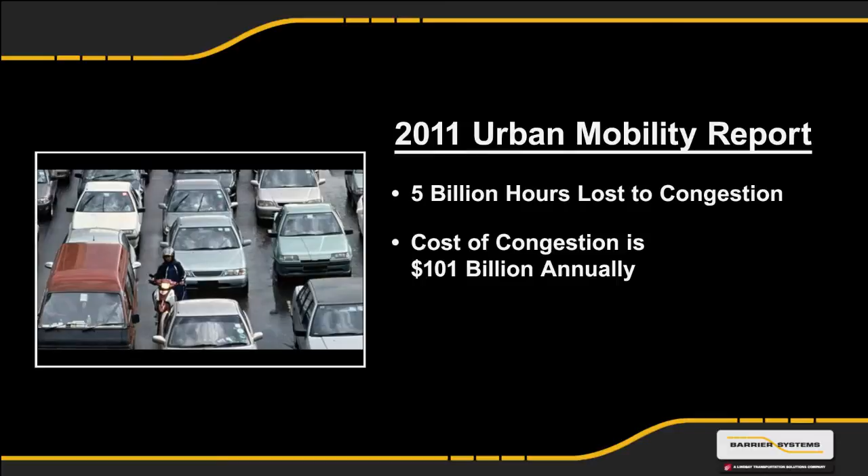While population, drivers, vehicles, miles traveled, and hours of delay have all seen double-digit growth, the number of lane miles of roadway grew only 6.6% between 1982 and 2006. The new challenge for planners and highway engineers is to utilize cost-effective methods and technologies in order to meet this increasing highway demand.

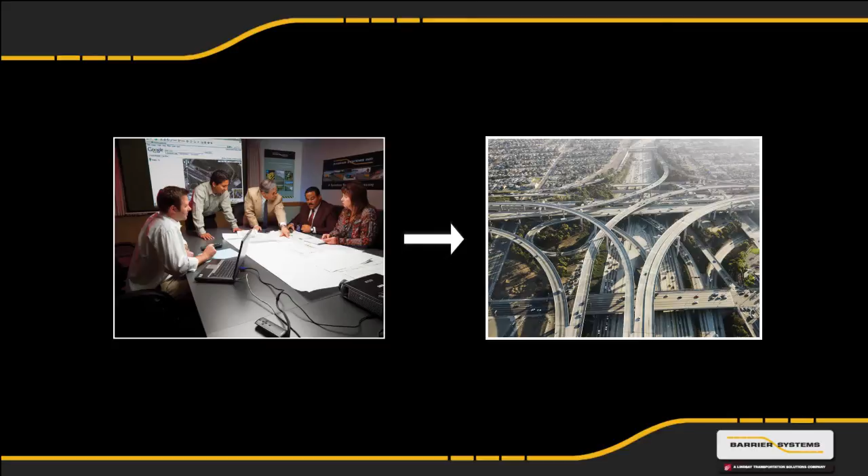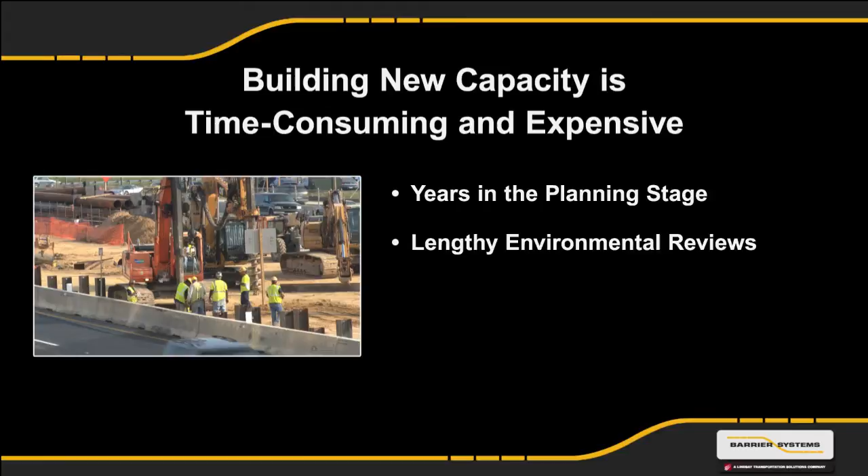One approach to congestion mitigation is to build new capacity by adding new roadways or by increasing the size of existing roadways, either outward with widening, upward in elevated structures, or downward in tunnels. Building new capacity is both time-consuming and extremely expensive, up to $10 million per urban lane mile according to the FHWA.

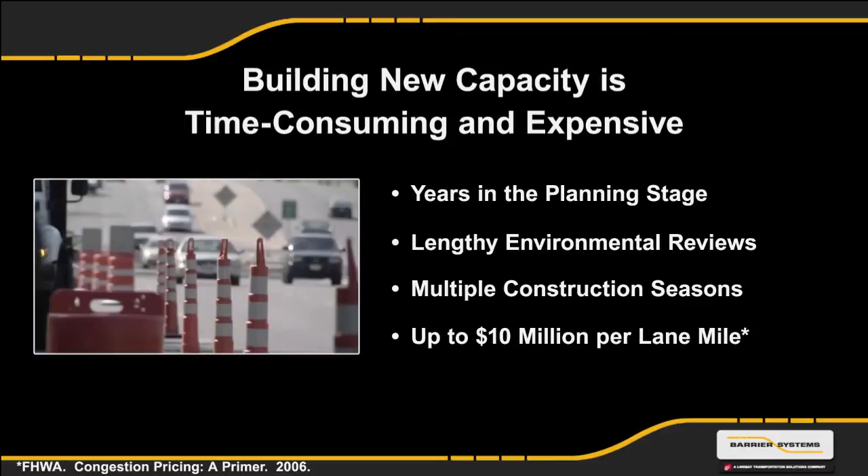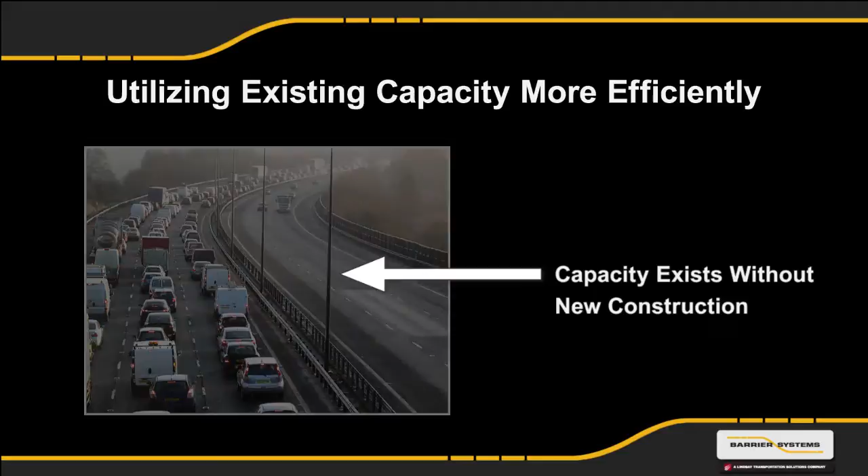Another congestion mitigation strategy focuses on utilizing the existing roadway capacity more efficiently with little or no additional construction. Managed lanes are growing in popularity as many agencies search for alternatives to expensive new construction. Agencies that implement managed lane facilities must choose a method of separating opposing lanes of traffic.

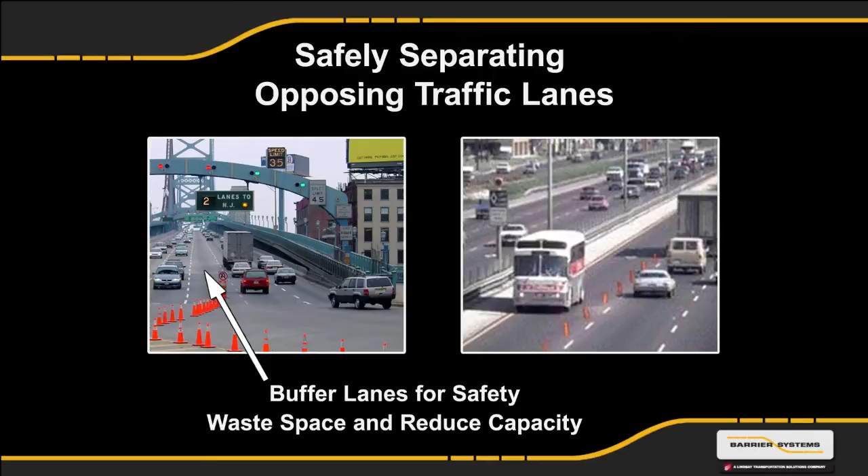Overhead lights and plastic delineation are common in managed lanes facilities, but there are serious safety implications, and eventually this type of configuration will result in head-on collisions with serious injuries and fatalities. Buffer lanes can be used, but this defeats the purpose of using managed lanes to mitigate congestion.

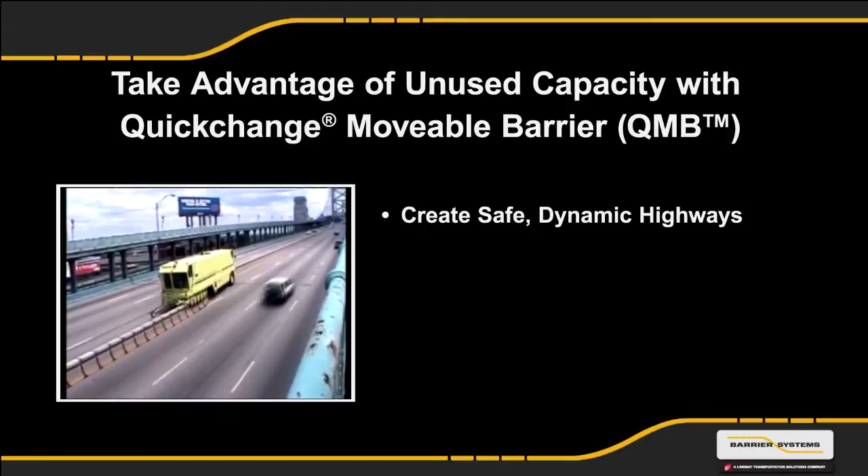Movable barrier technology is used for managed lanes and construction applications to create safe, dynamic highways that offer real-time roadway reconfiguration while maintaining positive barrier protection between lanes. For managed lanes facilities, movable barrier is used in areas where there is a directional or tidal traffic flow to redistribute unused capacity from the off-peak traffic direction to give more lanes to peak traffic.

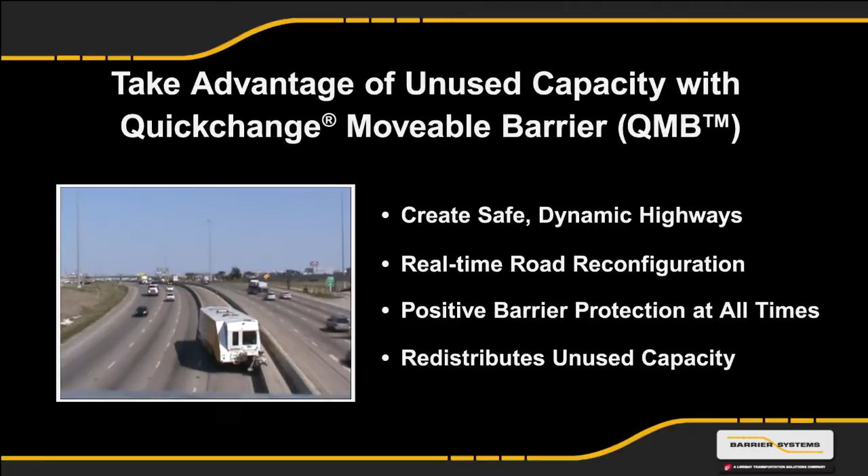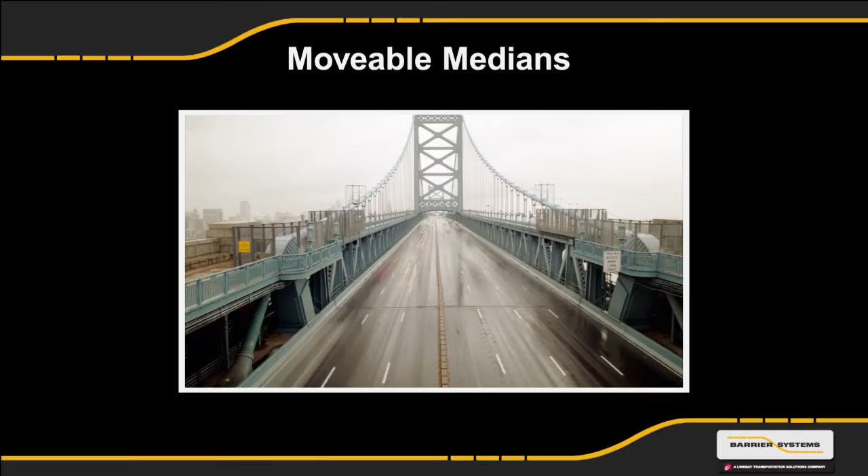The movable median is perhaps the simplest way of optimizing highway capacity. In this case, there is no fixed barrier on the highway, and the movable barrier is the only barrier. The barrier is moved back and forth multiple times per day to reconfigure the roadway based on the needs of peak traffic.

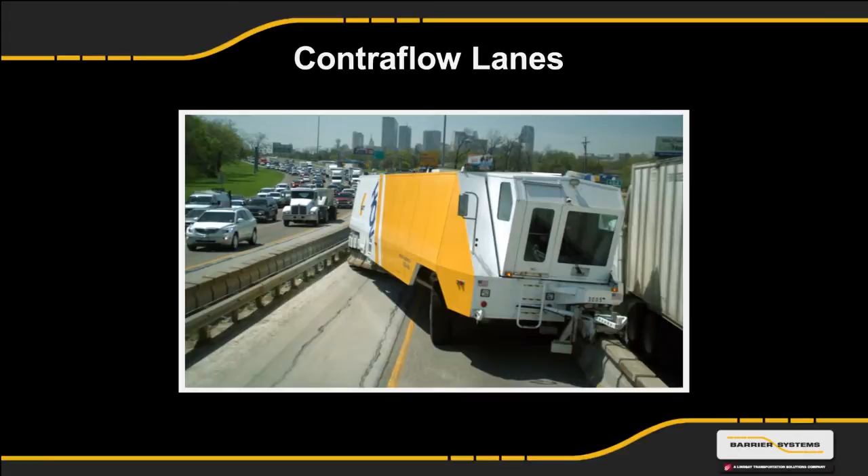In cases where a single movable median barrier may not be practical, contraflow lanes can be created using two movable walls, one on each side of the roadway. The barrier is moved out one or more lanes to give extra capacity to the peak traffic direction, and the lanes are returned during off-peak traffic periods.

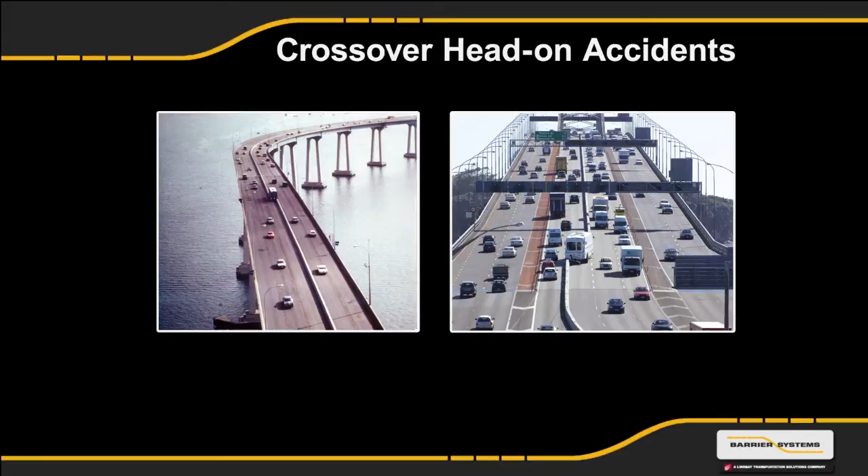The critical importance of positive barrier protection between opposing traffic lanes can be seen in these case studies. In each case, plastic delineation and overhead lights were used to separate traffic as the lanes were reconfigured throughout the day.

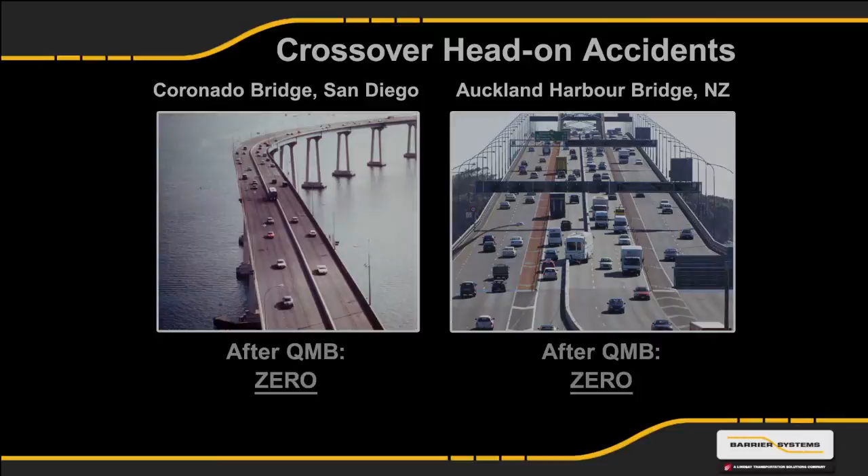The Coronado Bridge in San Diego had 21 crossover accidents in the 3 years prior to implementing movable barrier with 2 fatalities, and the Auckland Harbour Bridge had 20 crossover accidents in the 5 years prior to movable barrier with 10 fatalities. Since implementing the positive protection of movable concrete barrier, both facilities have experienced 0 crossover accidents and related fatalities.

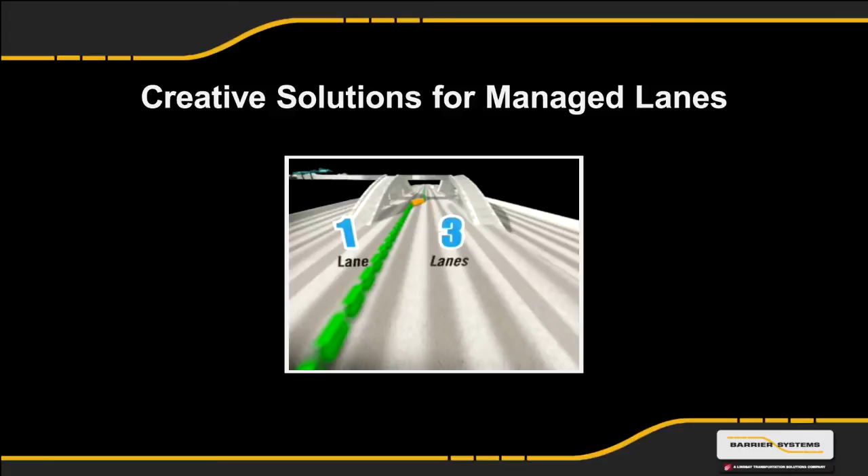Movable barrier provides agencies with a flexible and safe way to create unique managed lanes facilities. In San Diego, the I-15 corridor has 4 lanes in the center of the freeway with a movable median to create a 1-3, 2-2, or 3-1 configuration based on the needs of peak traffic. In Sydney, Australia, a movable median barrier adds a center lane to the peak traffic direction, and the outside lane is converted to a bus-only lane during the AM peak.

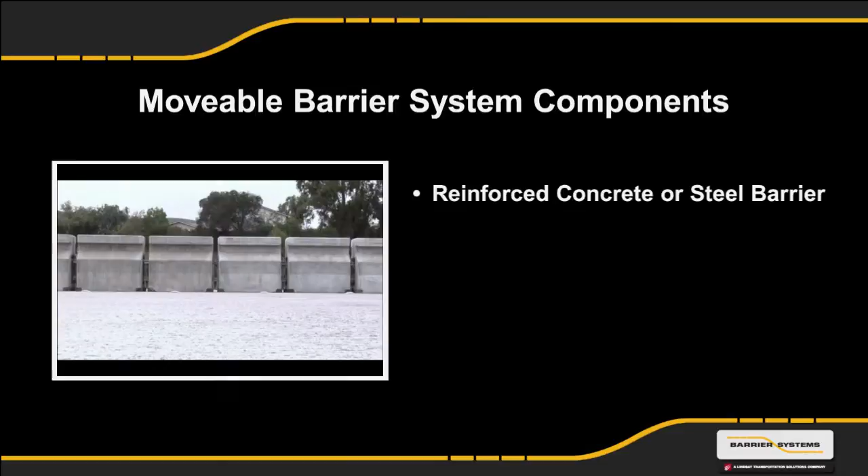Movable barrier is a 2-part system. The first part consists of 1-meter sections of highly reinforced concrete or steel barriers that are pinned together at each end to form a continuous barrier wall. The barriers have a modified T-top, which acts as a lifting surface for the transfer machine.

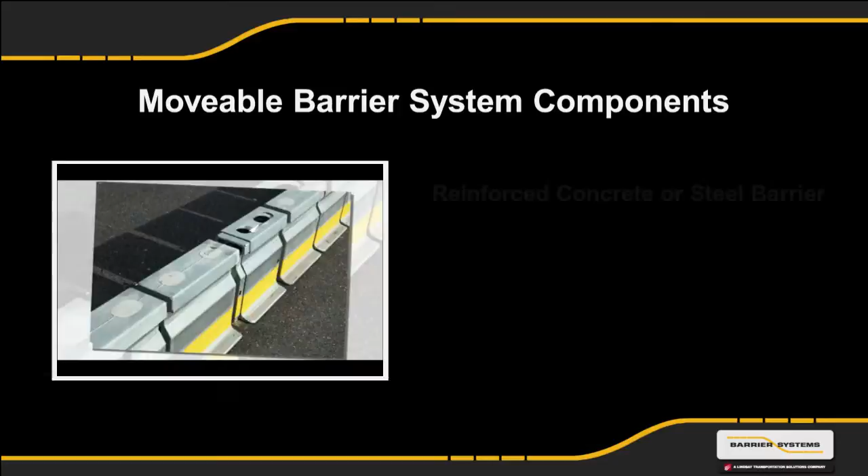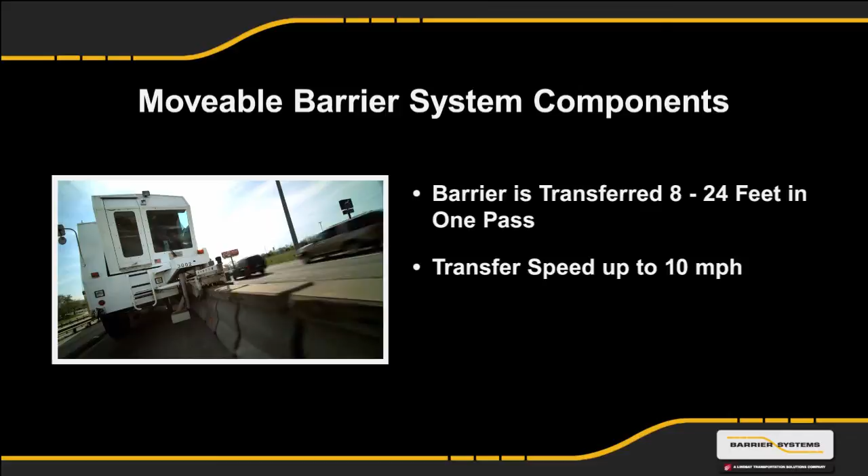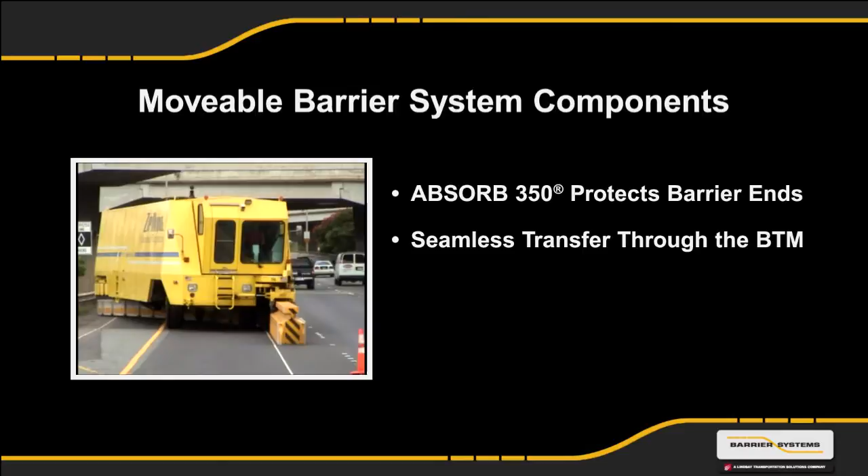The second part of the system is a barrier transfer machine, or BTM, which lifts the barrier and passes it through an inverted conveyor system, transferring the barrier from 8 to 24 feet in one pass at speeds up to 10 miles per hour. When necessary, the ends of the barrier are protected with the Absorb 350, a water-filled crash cushion with a T-top that is also pinned together so that it can articulate through the transfer machine for seamless operation of the entire system.

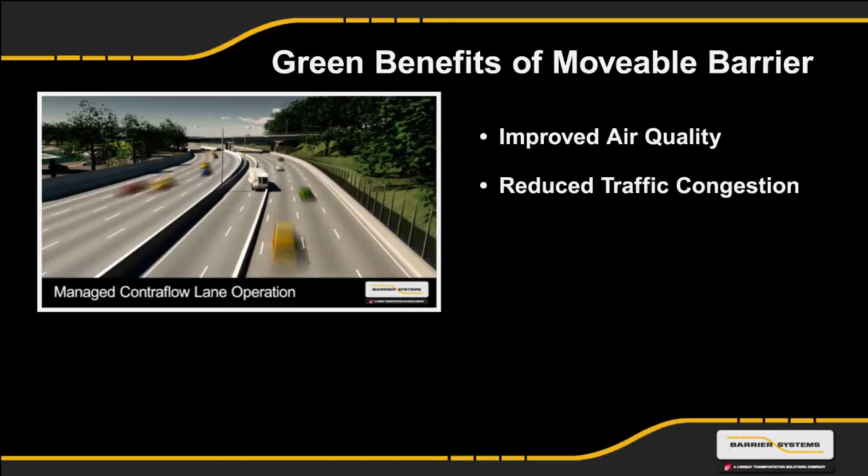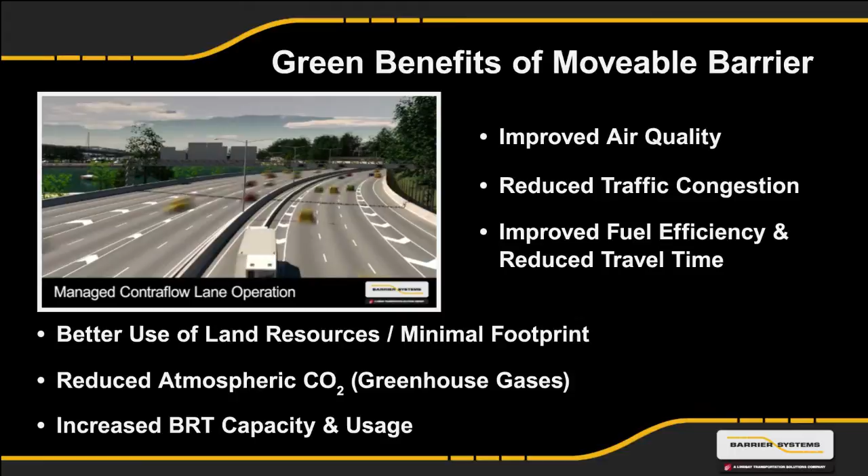Movable barrier provides environmental benefits from mitigating traffic congestion, including improved air quality, reduced traffic congestion, improved fuel efficiency, better use of land resources with a minimal environmental footprint, reduced atmospheric CO2, and increased bus rapid transit capacity and usage.

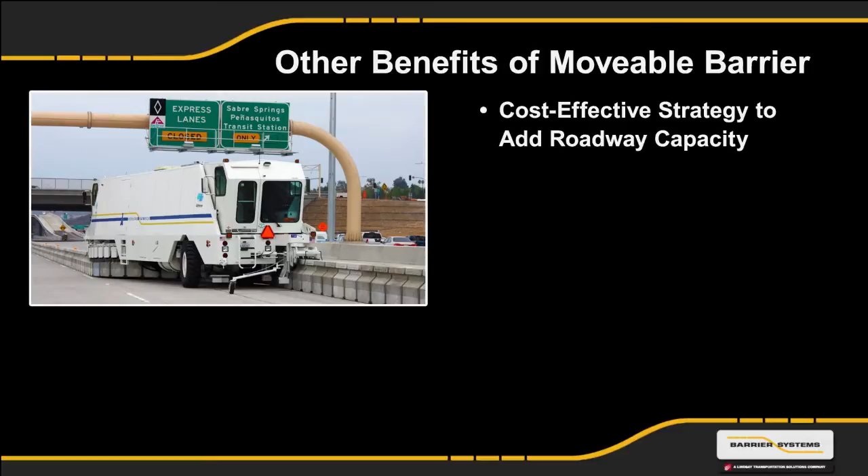The movable barrier system has other benefits that should also be considered. Movable barrier is a cost-effective strategy to add roadway capacity. The system can be operational in months compared to years for new construction. The safety of the managed lanes facility is improved with positive barrier protection.

Barriers can be unpinned and opened for improved incident management. The system is a reusable asset that can be redeployed multiple times as conditions require. At about a tenth the cost of constructing urban freeway lanes, it stretches transportation dollars.

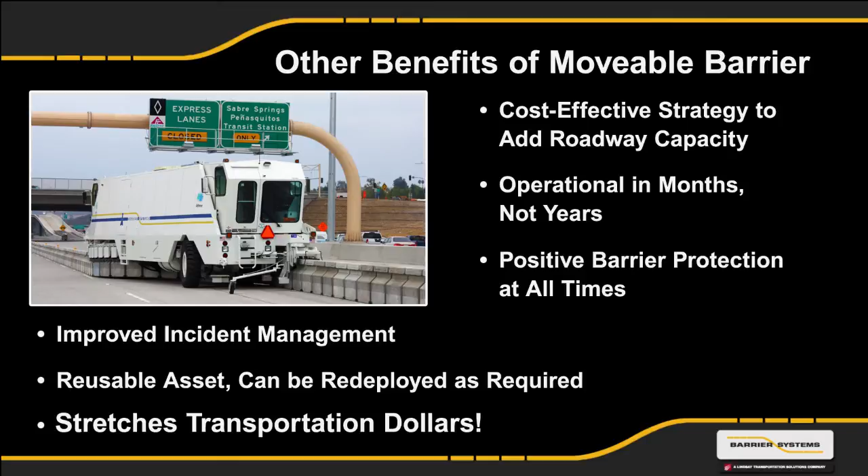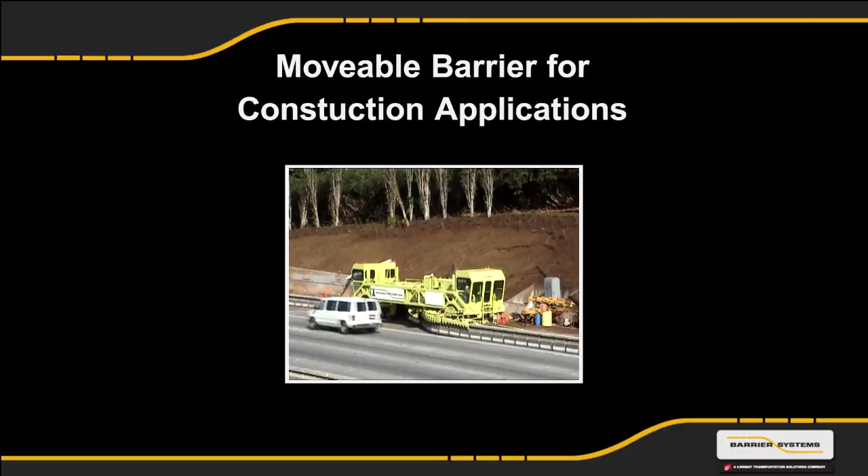Movable barrier can also be used in construction projects to provide positive barrier protection, accelerate construction work, mitigate congestion, and reduce, combine, or eliminate construction staging. Movable barrier leaves more lanes open for traffic during peak periods and creates more work zone space during the off-peak.

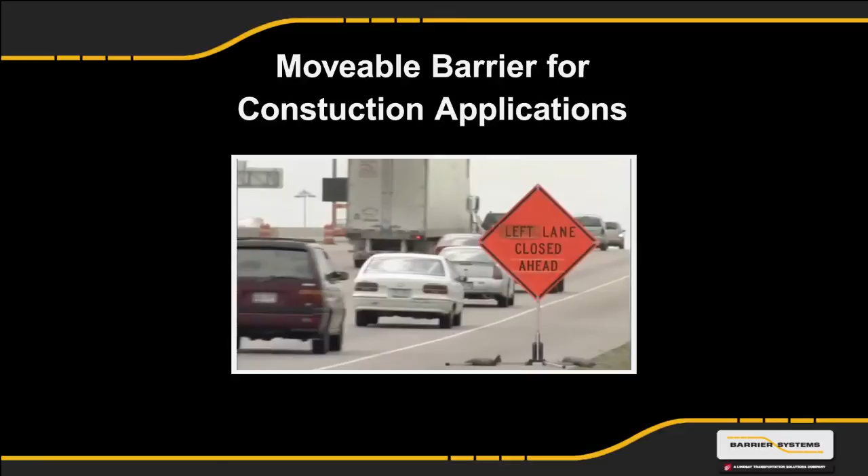In a construction work zone, there should be a balance between the number of lanes that are available for motorists and the space requirements of the contractor. Typically, this is addressed in one of three scenarios. First, to give the maximum number of lanes to traffic, the size of the work zone must be reduced. In this scenario, congestion is minimized, but the work zone is confined and inefficient.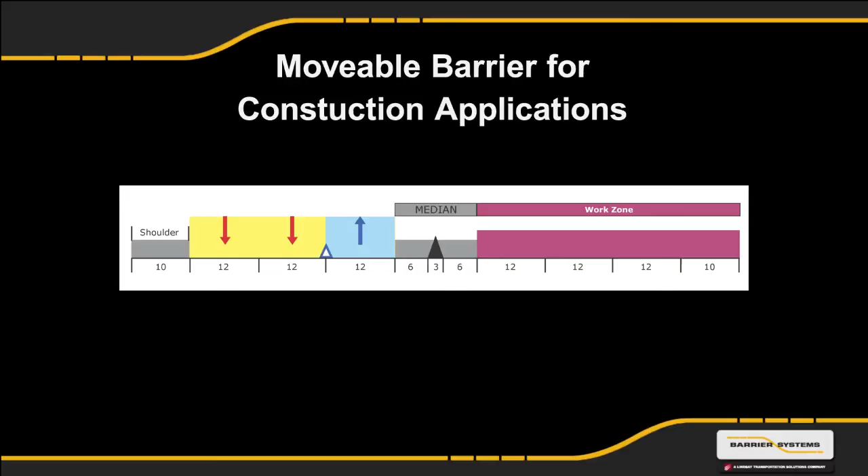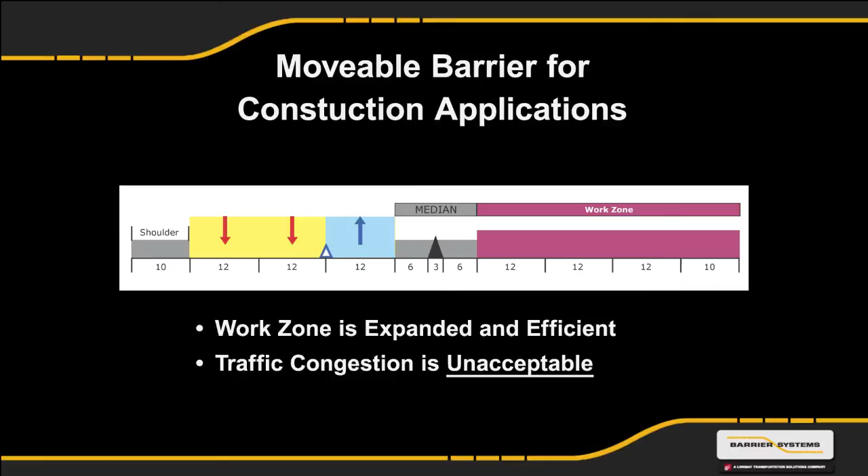In the second scenario, the work zone is expanded. This allows for larger, more efficient equipment to accelerate the construction schedule, and more space means a safer work zone. The impact on traffic is increased, however, as the number of vehicle lanes is now reduced, creating congestion and potentially increasing vehicle accident rates.

The third scenario is the most efficient use of the roadway. In this case, the maximum number of lanes is made available to motorists during peak traffic hours, and the road is reconfigured to increase the size of the work zone during off-peak hours.

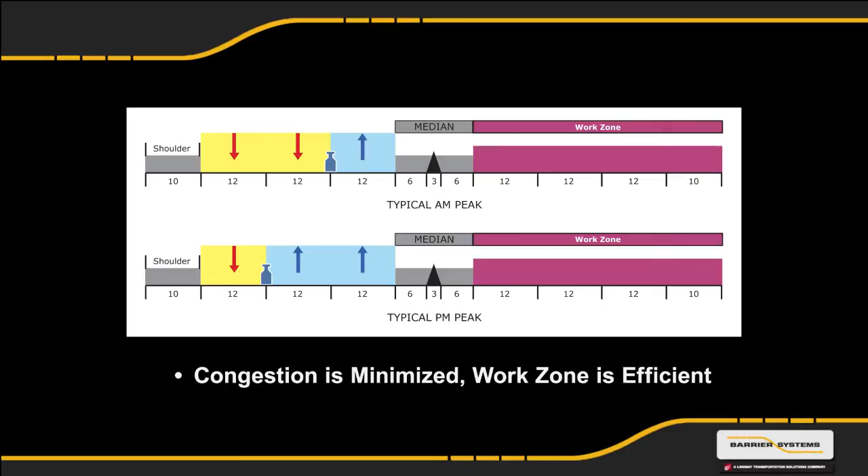Unfortunately, implementing a flexible divider between vehicle traffic and the construction work zone is traditionally accomplished by using plastic cones, barrels, and other flexible delineators that offer no positive protection. This can lead to work zone intrusion accidents with injuries and fatalities.

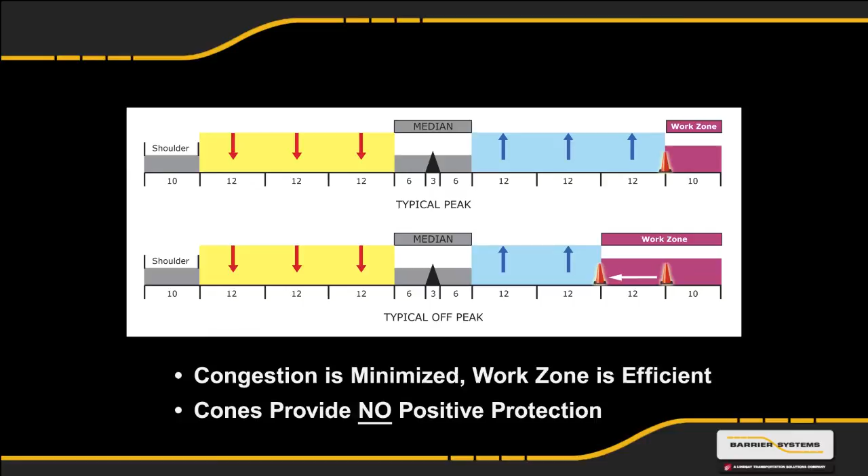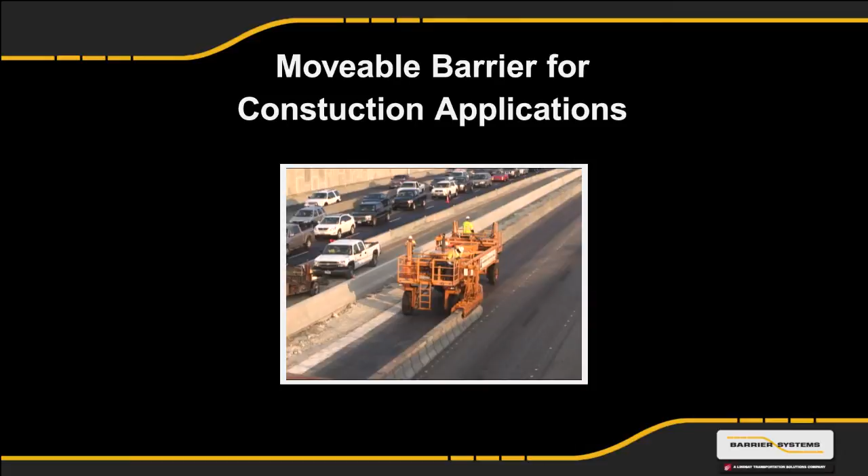One solution to this problem is movable concrete barrier. Movable barrier is a crash-worthy lane separator that can be reconfigured in real time to give more lanes to peak traffic or expand the work zone during off-peak hours. Vehicle mobility is maximized without compromising the safety of positive protection.

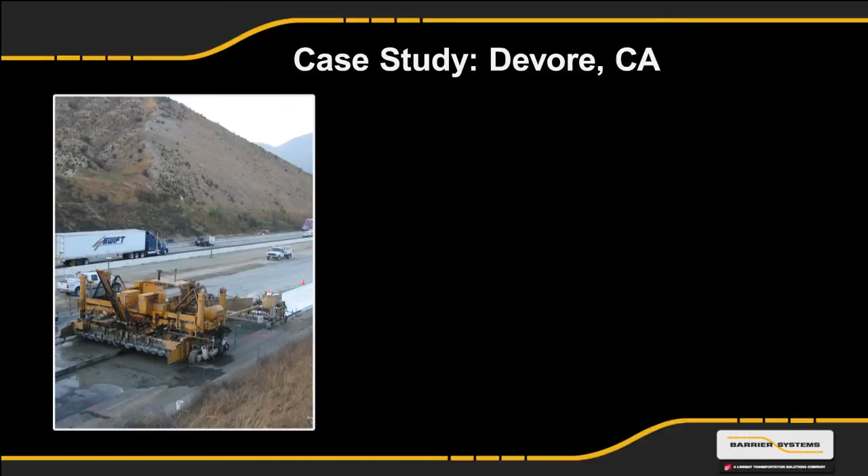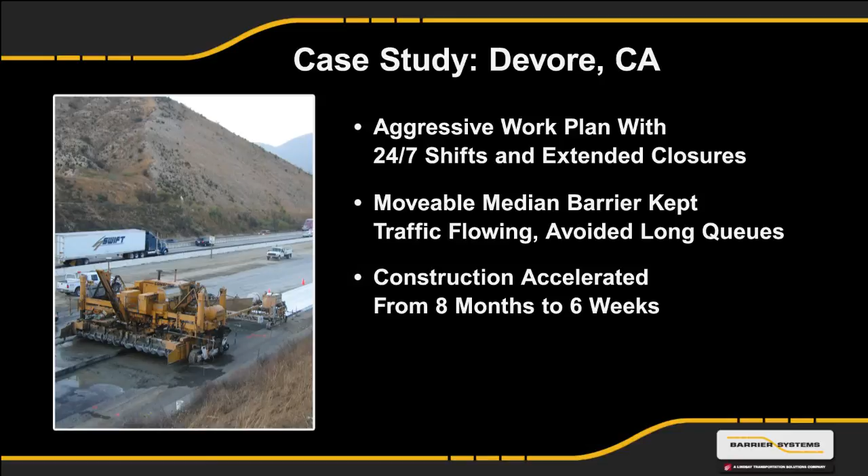On I-15 in Devore, California, Caltrans implemented an innovative work plan that combined 24-hour shifts and extended road closures to accelerate a pavement rehabilitation project. A movable median barrier was deployed to keep 2 lanes open in the peak direction at all times. The construction schedule was accelerated from 8 months to 6 weeks.

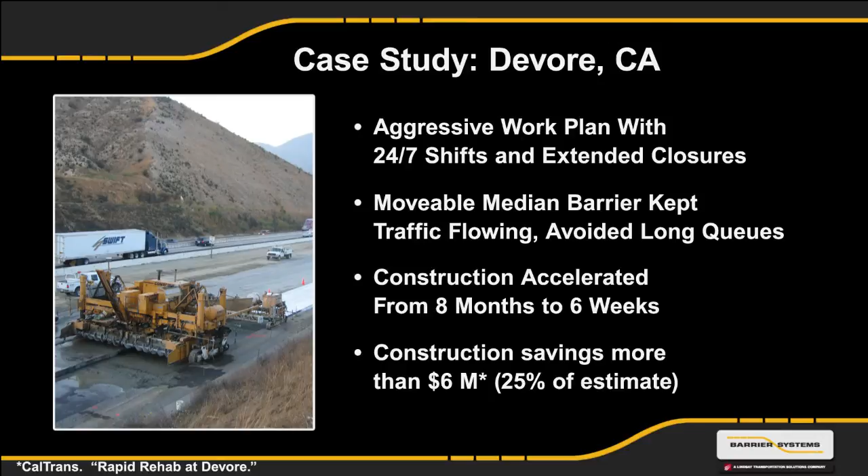Caltrans realized a construction savings of more than $6 million, 25% of the original estimate of the total job. And movable barrier kept traffic flowing and avoided long queues during peak travel times.

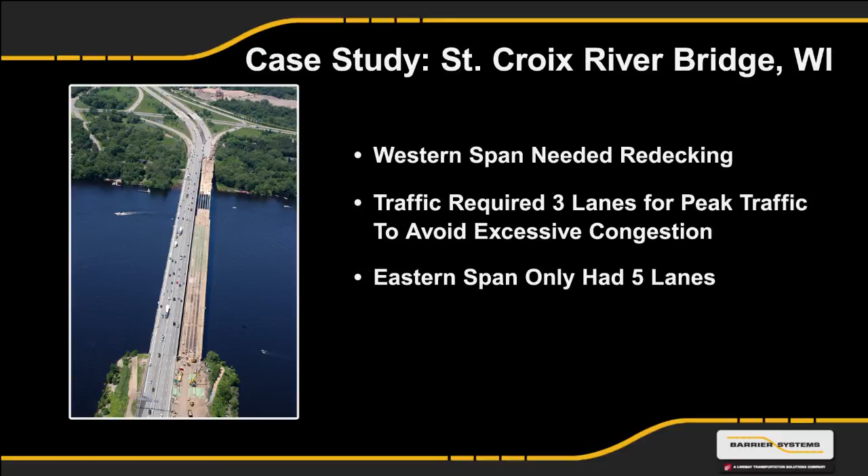In Wisconsin, the western span of the St. Croix River Bridge needed redecking. It was determined that to avoid massive traffic backups, 3 lanes of the eastern span would need to be available for peak traffic at all times, but there were only 5 lanes available. A movable barrier was implemented to create a 3-2, 2-3 lane configuration based on peak traffic conditions.

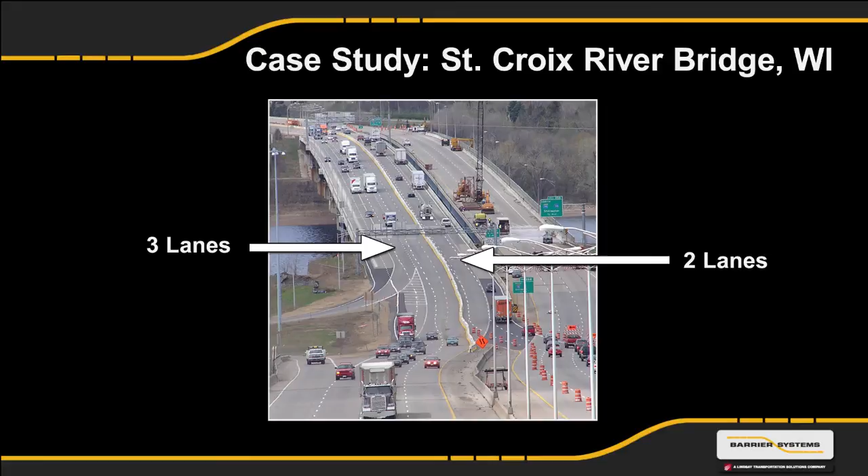This allowed the western span to be closed completely for repairs instead of staging the repairs to keep traffic lanes open. The average peak period traffic speed was 51 miles per hour. It was estimated that without the movable barrier, peak speeds would have stalled at 9 miles per hour. Because of the full span closure, construction was completed in 1 season instead of 2.

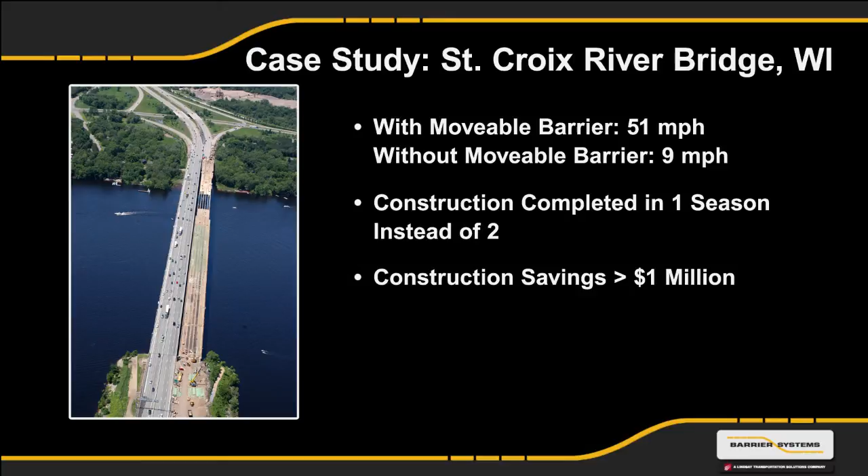Construction savings from early completion were estimated at greater than $1 million. User delay savings were estimated at greater than $1.5 million. Because of the positive protection, there were no crossover accidents during construction.

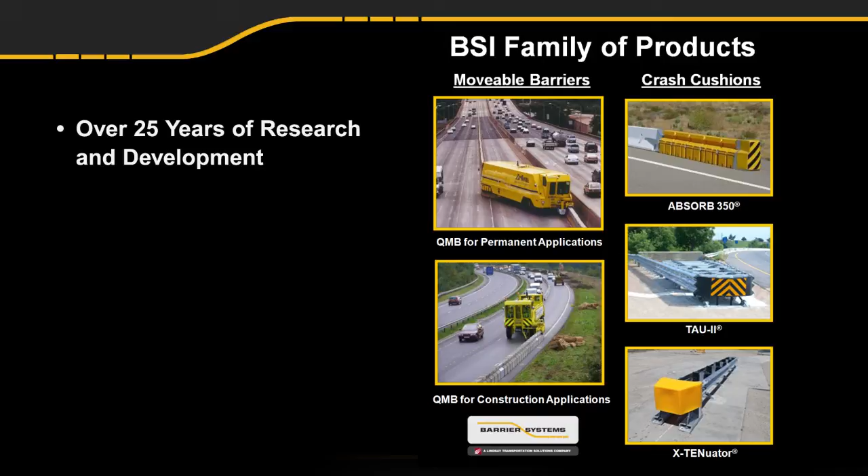Barrier Systems has been helping agencies solve their traffic congestion problems in permanent and construction applications for over 25 years. With hundreds of movable barrier projects worldwide and a full line of road safety products, Barrier Systems has the experience to help design engineers find the best solutions for traffic mitigation and work zone safety and efficiency.

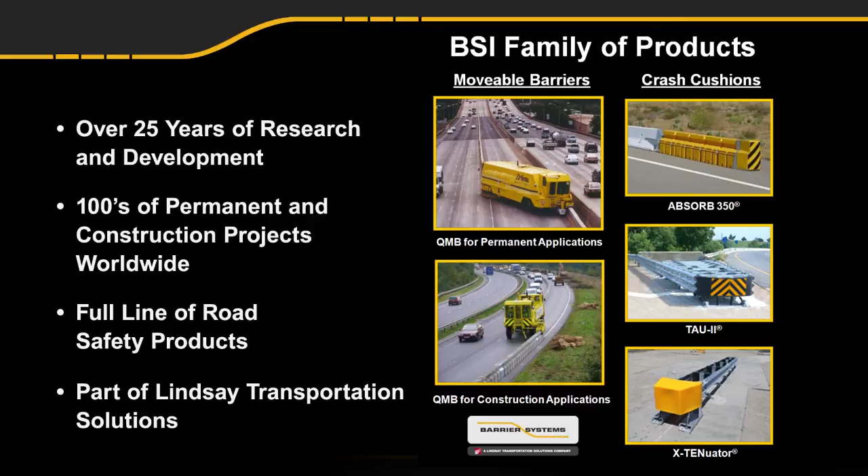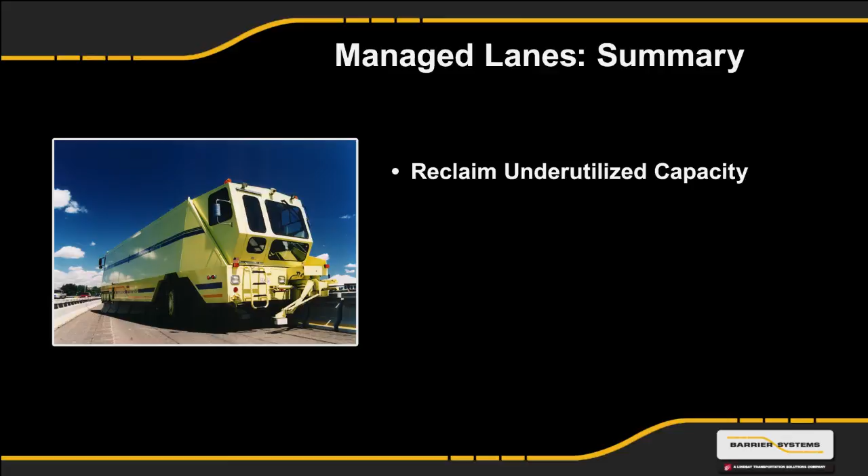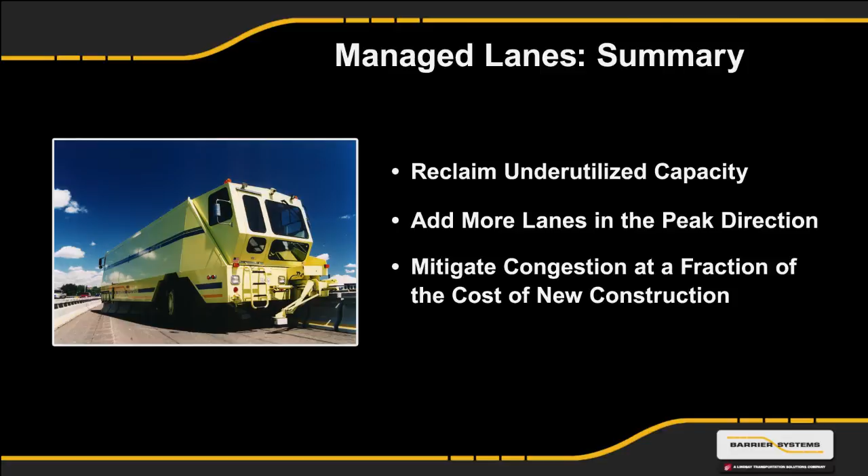For managed lane facilities, Movable Barrier offers the unique option of being able to reclaim underutilized capacity and provides more lanes in the peak direction with little or no cost for new construction. Using movable medians and contraflow lanes with Movable Barrier, agencies can address their congestion problems at a fraction of the cost, time, and resources required by traditional construction methods.

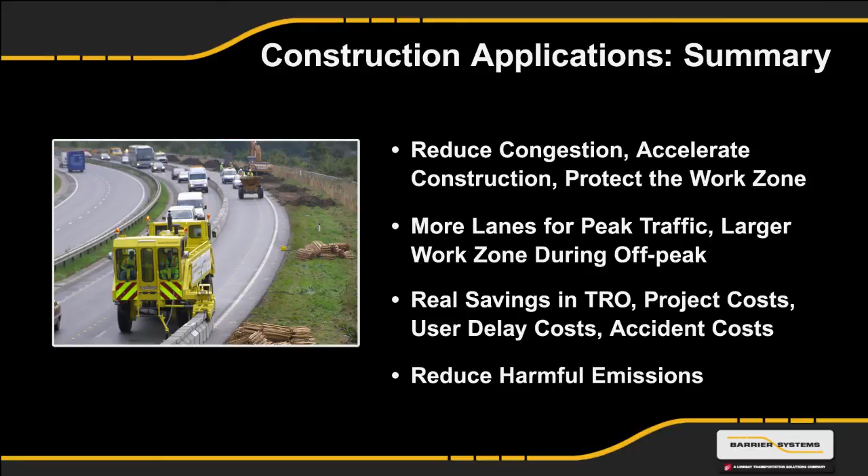For construction applications, Movable Barrier is used to reduce work zone congestion, accelerate the construction process, and protect the work zone by using positive barrier protection to keep more lanes open for peak traffic and open more workspace during off-peak hours. Movable Barrier creates real savings in time-related overhead, project costs, user delay costs, and the costs associated with accidents and fatalities, while reducing harmful emissions created from work zone congestion.